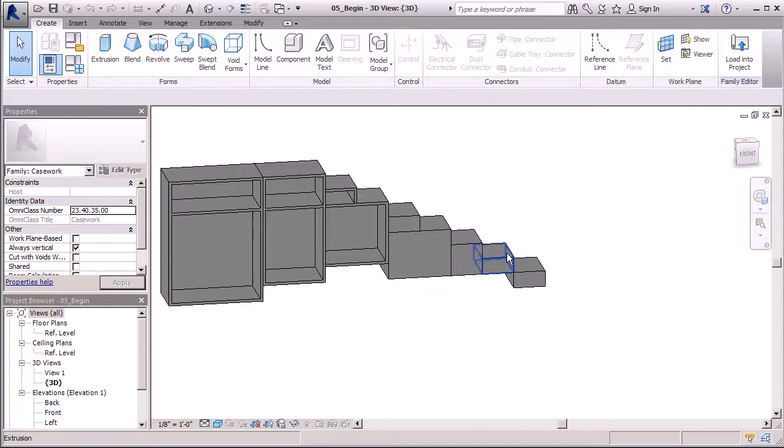Let's get modeling. It looks like we have about half the voids in our model here. I'm going to finish this out because I know I'm going to have a couple more compartments. I've got some drawers in this area, and I'm even going to have a little swing door here. So it's going to be nice to have those voids in place.

We can really quickly do that. So we'll jump to our front view and create some reference planes. Again, we're going to go with the pick line, and remember our wood's an inch thick, so we're going to set that offset to an inch thick.

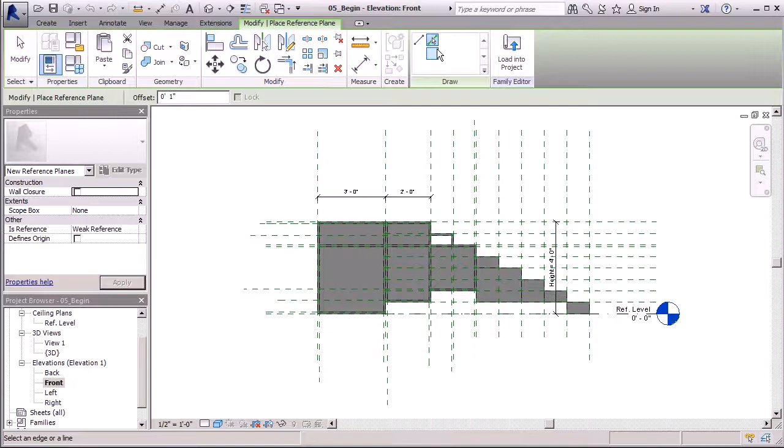I'm going to really quickly fly through this process now that we're familiar with how to set those. So we'll start here at the top. I'm simply going to click and drag, click this all the way across and drag.

I don't need too much of it outside of the extents. That can eat up a lot of time if I'm spending most of my time stretching out these reference lines or reference planes. I just need a little bit of it past the model so I can erase it later.

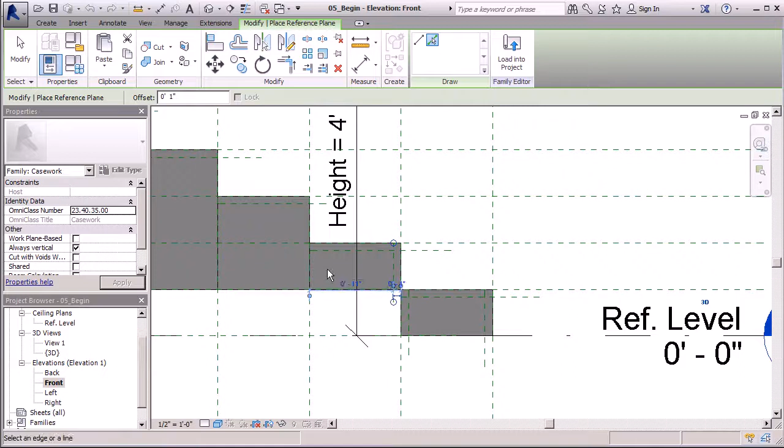But I'm going to make sure I get all my pieces of wood in there. That way I don't have any empty gaps later after we place the rest of these voids into our model.

So we're just about done. I just need to do a bottom piece for this area and we will be complete. And this one can actually be the reference plane for these several pieces.

Alright, so we have this side left to do and we are set. So we are now ready to model in the rest of our void form.

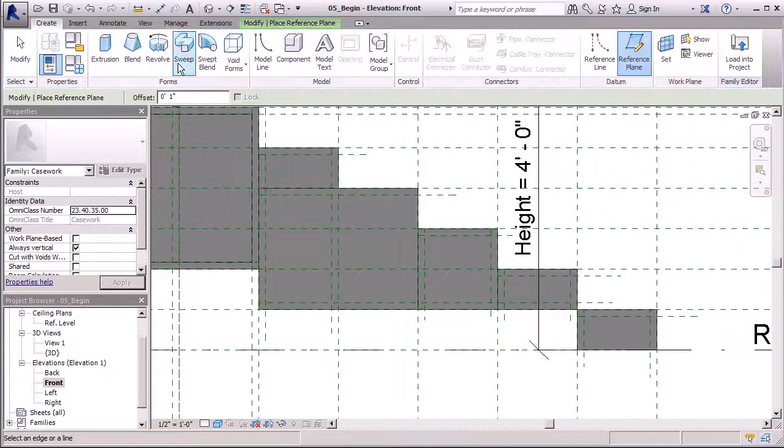So we'll go to Create, Void Form, Void Extrusion, and we'll start here with our compartment. These are all going to be rectangles, so I'll choose the rectangle tool, and then we'll start modeling here.

Again, it's such a great thing that we are separated by an inch thickness here. That way we can create all these forms in one hit, and also adjust them in one hit, saving us a lot of time. And this very last one here, there's no thickness on the very bottom. This is more of an upside down C form.

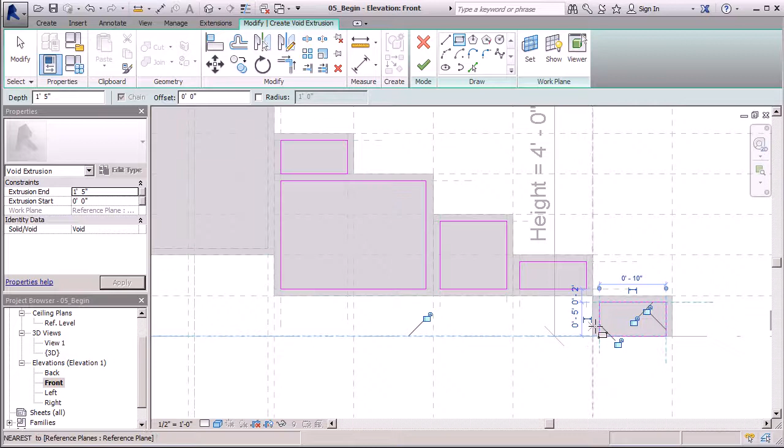So I'm liking where we're at right now, so I'm going to hit the green check mark. I'm going to jump to the floor plan view again, and we'll make one quick adjustment, dragging those in, accounting for thickness. And in 3D view, you can see we've completed our voids.

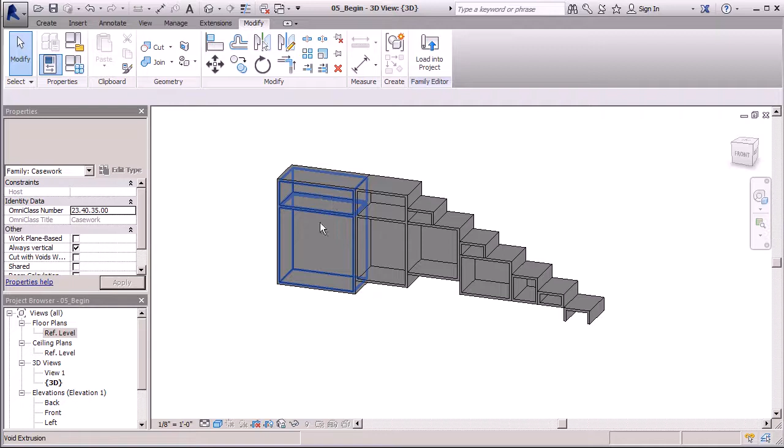So now let's jump to our first section here, and let's model in a set of glass doors. We have our compartment up here on top that'll be empty. But down here, we'll have a set of tinted glass doors with some handles. So let's go ahead and set those.

So I'm going to jump to my front view. When I'm working with a situation like this where I have a couple of different materials touching, I like to have a nice gap in between those materials. It creates a nice reveal or a nice space in between. So not only are these materials differentiated by how they're represented graphically, but you can see the space in between materials and you can see how things are put together.

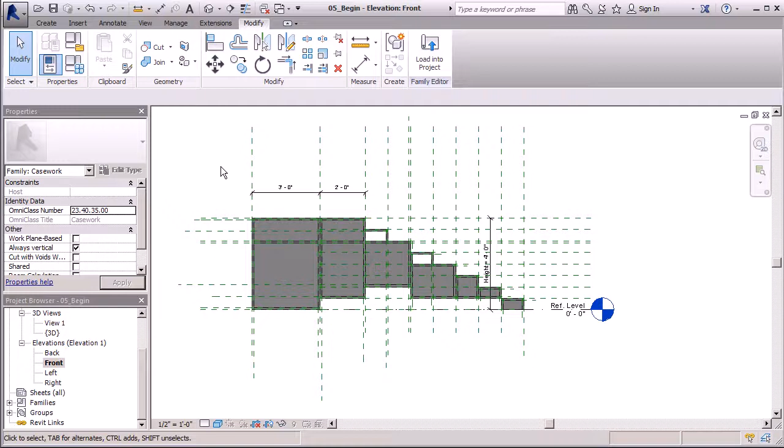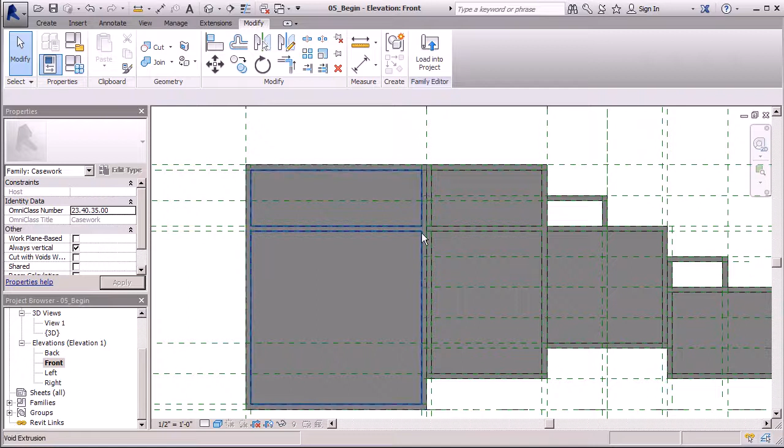And that's part of that detail that's really important, especially when you're doing maybe something for an interior architecture view or something. So in this case, what I would do is set a reference plane as a gap to create a gap, maybe 1/8 of an inch. A bit exaggerated, but it's easy to see around the edge of this. That way we know that these are glass doors set in nicely, and they'll be connected with some hardware.

So let's really quickly set those reference planes. We'll go to Create, Reference Planes, select line, and we'll create maybe 1/8 of an inch. We'll say 1/4 inch gap. It's a bit exaggerated, but it's easy to see.

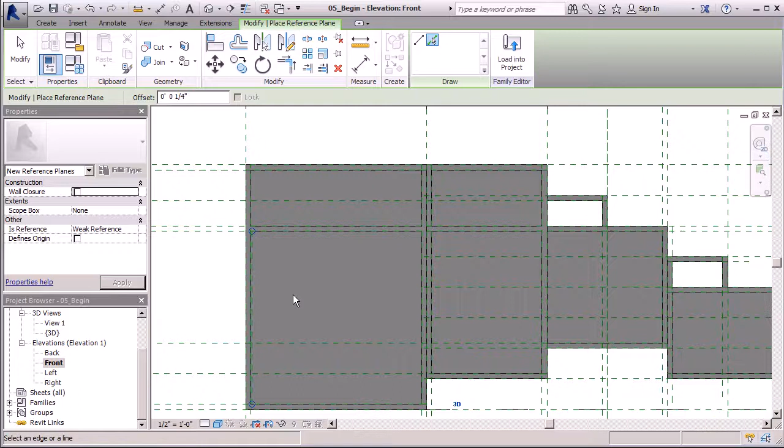So once I have that set, I'm simply going to go on the top, bottom, left, and right of our first selection here. I'm going to click and drag those model lines or reference planes beyond my extents, because later on I might need to get rid of those. I think I have all 4 in place. Let's do one more to locate the midpoint, so we can split the doors up nice and even.

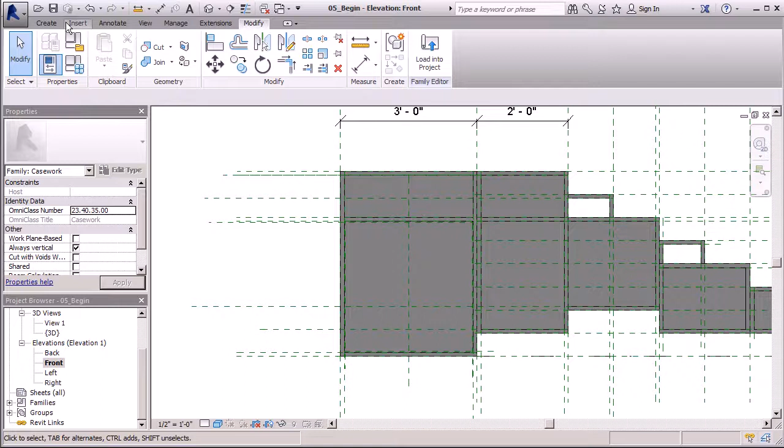All right, so now we can create our extrusions. We'll go to Create, Extrusion, and we want those to be 1 inch thick, so we'll change the depth to 1 inch, with no offset. We're going to go with a rectangle, and all we need to do is follow our offset reference planes here. Simply clicking and dragging, and now we have our first piece in place.

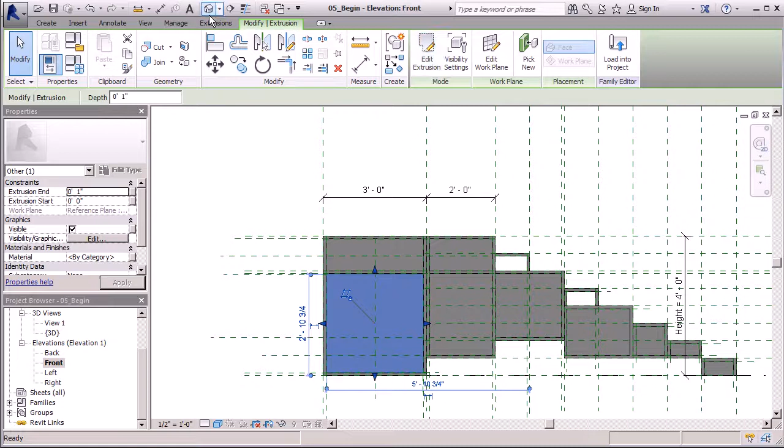If I wanted to, I can go and continue this process on with all the rest of the areas, but we'll have to set some reference planes first. But let's hit this green check mark, go to 3D view, and see if there's any changes we need to make.

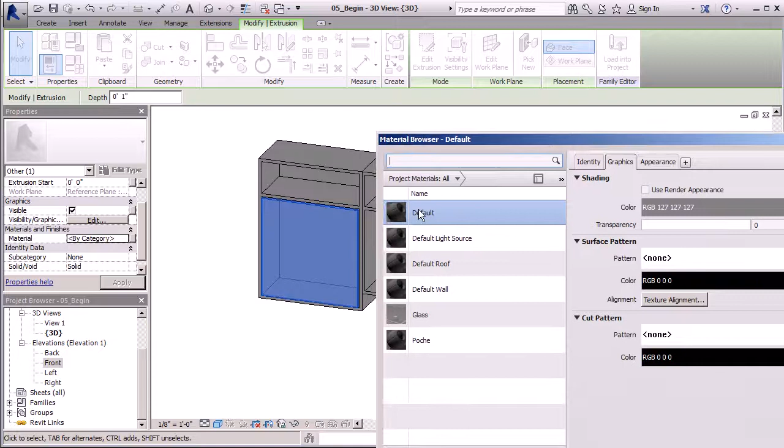Let's change this material. I'm going to click on this extrusion we just created, and here in the Properties window, under Materials and Finishes, we have Material. I'm going to click on that, and it'll expose this little box. Now we can actually create a material to associate with this door. Revit has some by default, and you can actually go in and create your own. Luckily, we have glass already in place, so I'm going to go with that.

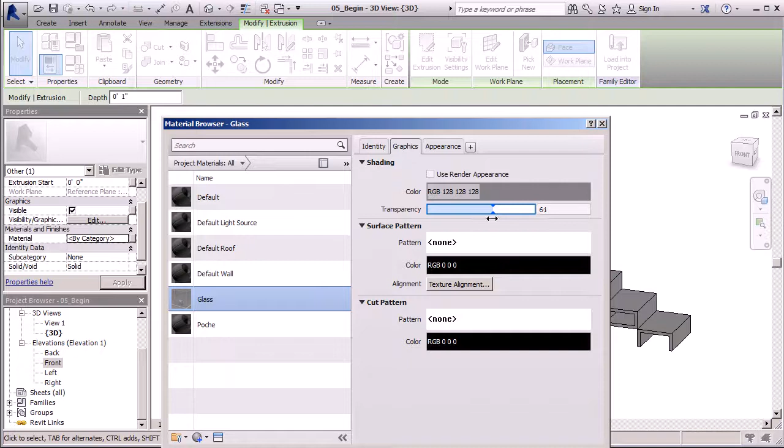The only change I want to make is I don't want it to be blue glass. I'm going to give it more of a dark tint look, so let's see how this dark gray will look. You can adjust its transparency down here below. It's really high right now, so since it's a light color, I'm going to bump down the transparency a bit to 60, and see how this looks. I'll click apply, okay, let's see how this looks. Yeah, up against this material, you really can't tell.

So what we're going to need to do is change the material of our wood here. I'm going to click on this and take the same approach, go to my properties window, and change materials. This time we'll actually have to create one, so I'm going to go to this little sphere here with the plus on it, which lets me create a material. I'm going to create a new material, and we're going to rename it. Right-clicking, rename, and we'll call this one cherry wood. We'll make this out of cherry here. Click OK.

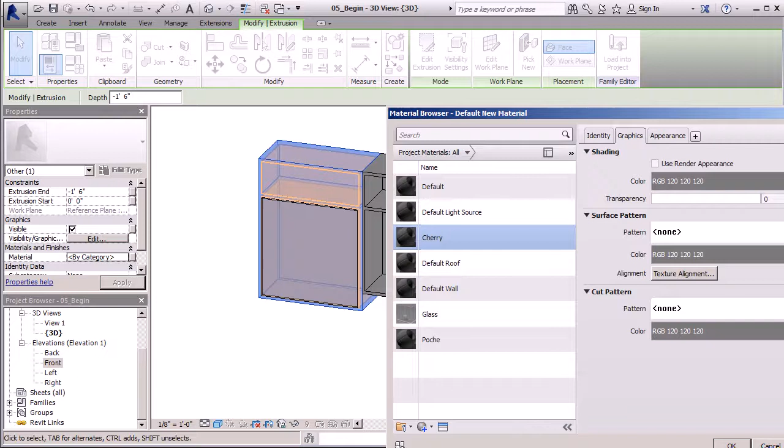Actually, let me go back in there again, and we'll go back to materials. You can see my title here, but the only thing we need to do is give it a shading or a color. So let's give it a color that will differentiate it from that glass, so we'll go with the wood with a nice little red cherry tint to it. This will work for me. I'll click apply, OK, and you can see now there is some differentiation between what's going on with the glass and the wood.

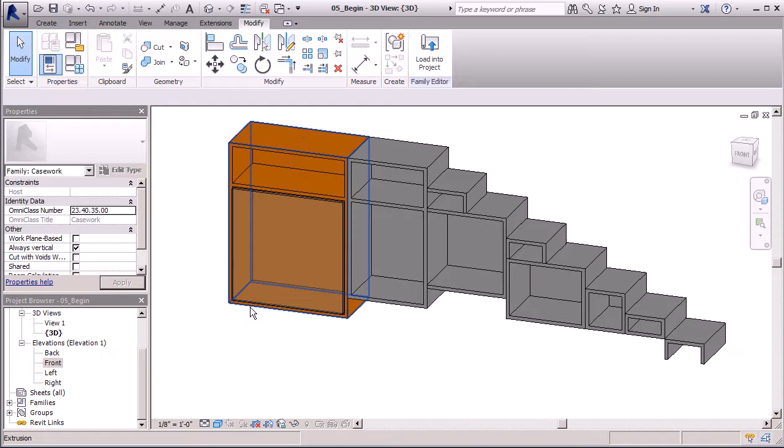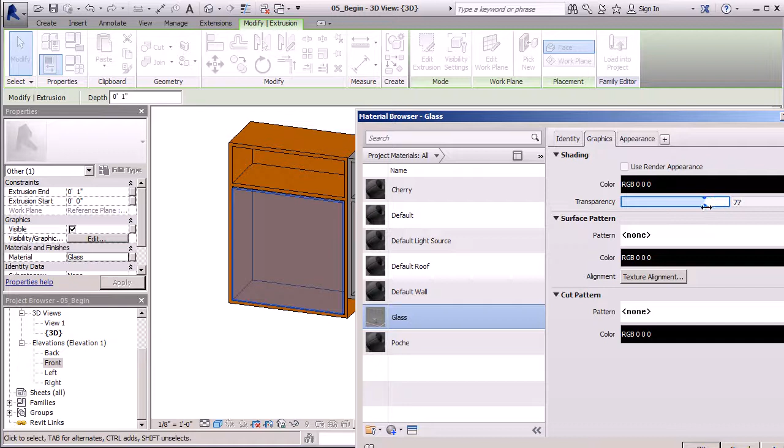So let's click on that glass once again, and I think we can assign a darker color to that one, which will make it a lot easier to see what's going on. We'll go back to materials, and again you can kind of tweak this as you go to get it exactly where you want it. I'm going to go with a darker color here, and when I add a darker color, I'm also going to increase its transparency, so let's take it to 75 and see how that looks. Apply, OK. That works. I know that there's a piece of glass there and it's tinted, and you can kind of see through it just a bit.

So we're not totally done yet.

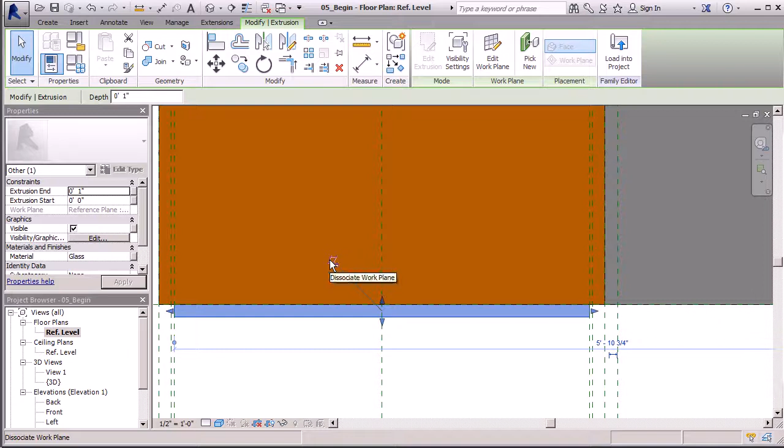Let's jump to our floor plan view and make sure our glass is placed nicely inside our model. I'm going to click on it and disassociate its work plane. You'll see this rectangle here - click on that, and that disassociates the work plane. Now I can move this shape anywhere I want, not just on one particular work plane. I'll click my move button and simply bring it inside our model. When we go to 3D view, you can see it's placed nicely in there.

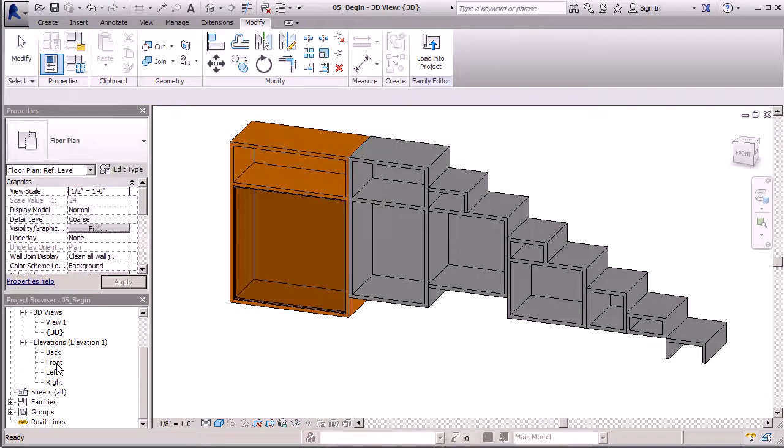Let's take this same approach and quickly add some drawers to our smaller compartments. We'll jump to our front view and create some offsets using reference planes. We'll pick the line, and we want that to be about a quarter inch thick so we can really see it, focusing on our smaller compartments.

We'll place those offsets right here. Looks like that one didn't set properly - it's okay, we'll set it here, again clicking and dragging beyond those extents. We'll do the same for this one.

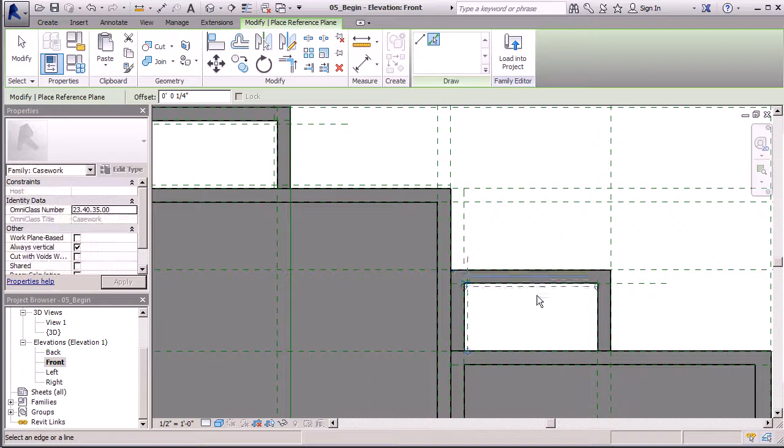When we begin placing the face in for these elements, we're going to go with a different one. We don't really need glass - these aren't going to be glass doors. Let me bring back my reference plane here, and make sure I offset that again a quarter inch. And that is it, perfect.

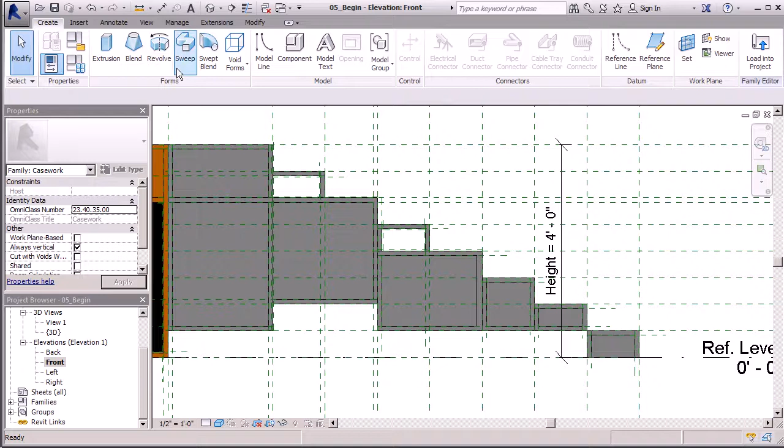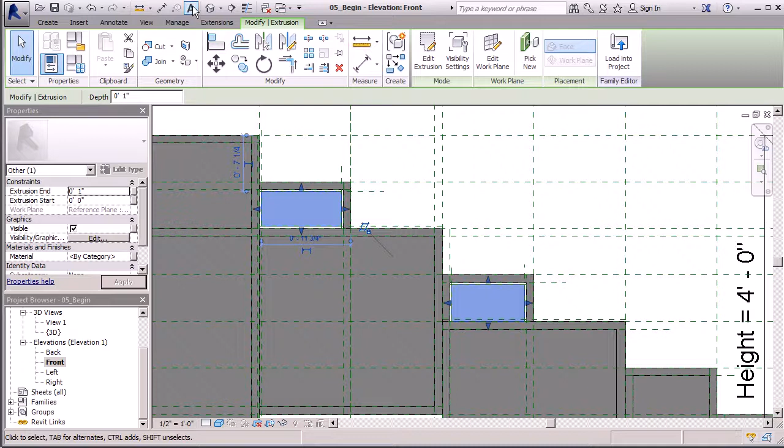We're going to add the drawers to these last two compartments. Now we'll go to create, go to extrusion again, and create an extrusion for these areas. Rectangle tool - go from one corner to the next. Since these are separated, there's distance in between and the lines aren't touching, we can create these two forms all in one hit here. Green check mark, and I'll go to 3D view - I see my forms are in place.

Let's assign a material to this one. We'll click on it, go to materials, just like we did with our glass door and our wood, and create a different one. We'll go to create new material and rename this one - we'll call it the face of our drawers, gray drawers. Just something really obvious that you'll always remember when working in this project.

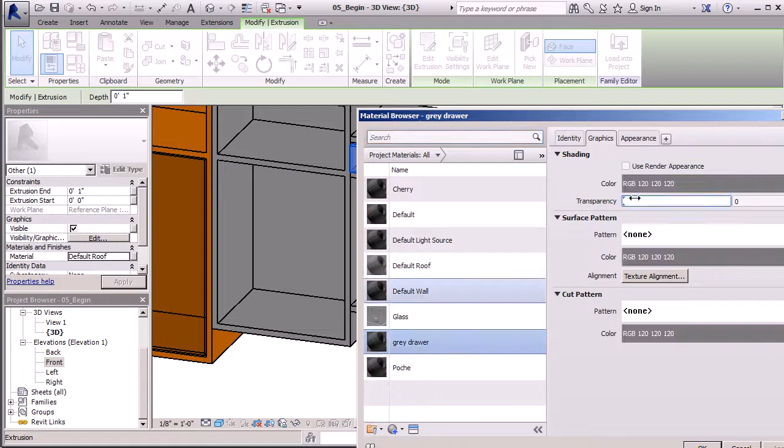Now I can click on that - actually we'll go back to my materials. Occasionally you'll jump back out of that window, so we'll go back to our grey drawer and assign a nice color to that. Looks like it has a gray color - let's darken that up just a tad. Click OK, Apply, OK, and you'll see we have a nice gray color attached to that.

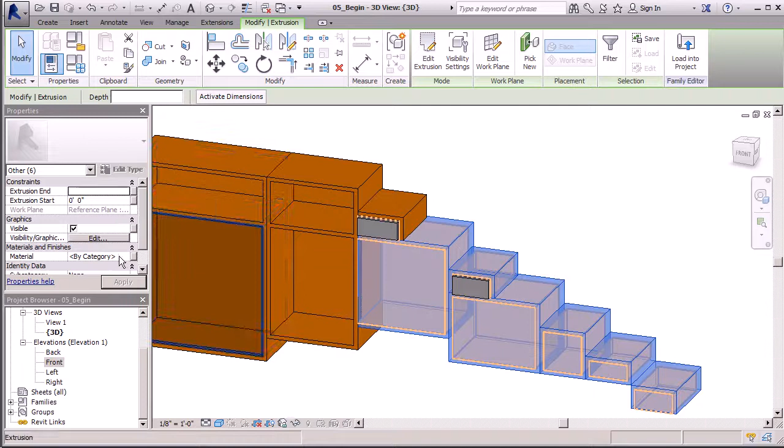All we need to do is change the color associated with our wood here. I'll click on that, go to material, and look for the one we just created, our cherry wood. I'll click OK, and now I can take the same approach to each of our wood casings. We'll go to our material - it's already there, OK. Let's see if we can select several - we'll select this one, this one - I think we can get this all done in one hit here. We should be able to go to the materials. Perfect, OK, Apply - there we go.

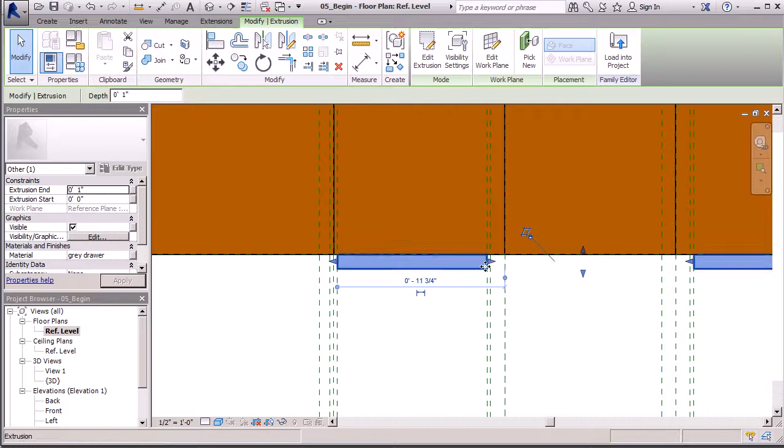So now we have our drawers in place, and we also have our glass door in place. One last adjustment - let's jump back to our floor plan view and make sure our drawer faces are lined up flush with the exterior of our model. Again, we'll click on that, disassociate work plane, move button, and simply line them up with the outside edge of our model. I'll jump to 3D view to make sure everything looks good, and I'm liking where we're at.

Perfect. At this point we can start adding more details like hardware and fixtures to this casework family, and we'll jump into that in the next lesson.